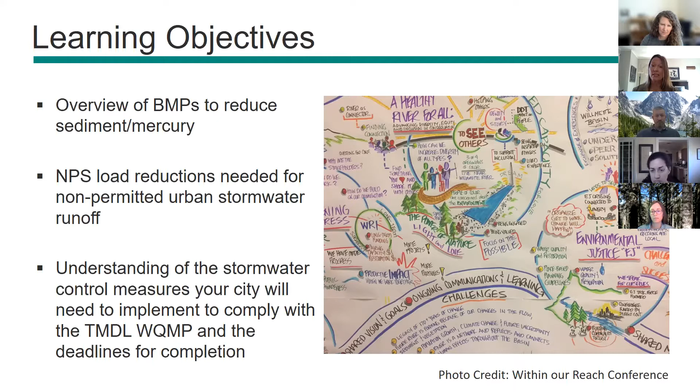This slide was shown in last week's presentation, and I wanted to show it again because I think it gives a nice overview, or a little bit of a framework, about where mercury is coming from and what our implementation strategies are going to be.

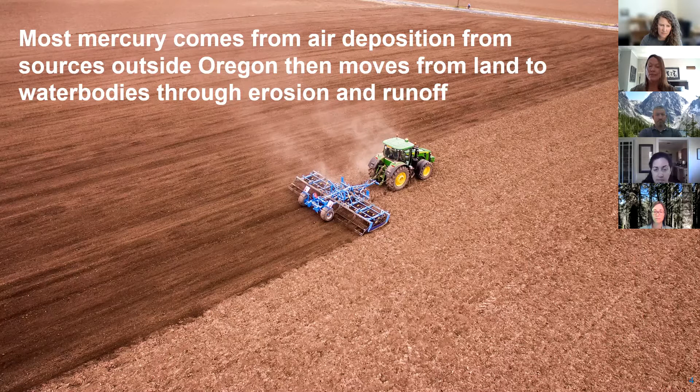Most of the mercury that is deposited in Oregon is coming from sources outside of Oregon - national sources, global sources of deposition, air deposition. These can come from coal-fired power plants, incinerators. There are other natural sources such as forest fires, which we're all very well aware of, volcanic eruptions, and the mercury that's contained in all sorts of products we use every day. So most of it's coming in that way.

Our primary implementation strategy for this TMDL is to reduce the amount of sediment and runoff going into Oregon's rivers and streams. So even if it is difficult for us to control those sources coming from outside the state, we're going to do what we can to reduce the amount of mercury making its way into rivers and streams.

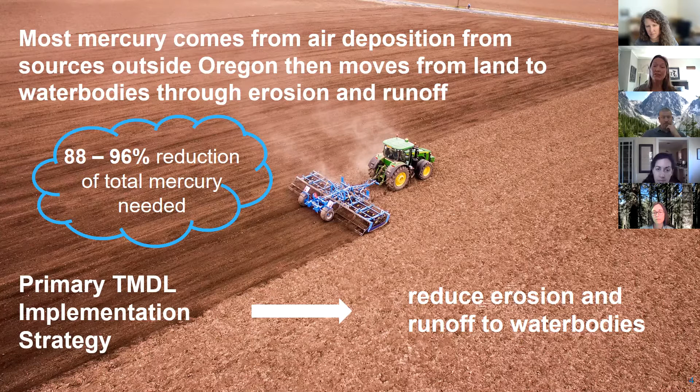There are large reductions to make for mercury for the Willamette Basin TMDL, and as you can see, it's 88 to 96% reductions needed. That is by subbasins - these are based on the 12 subbasins in the Willamette Basin. So very large reductions to meet, and that's mainly because we have a very protective methylmercury fish tissue criterion here in Oregon, updated in 2011. Because of that standards update, we needed to revise the TMDL to be able to meet that new methylmercury fish tissue criterion, so people can safely eat fish and shellfish caught in Oregon's waters.

EPA is also a DMA in this TMDL, so there are expectations for EPA. They have roles in cleanup of Superfund sites that we have, as well as air emissions, and they're going to help be responsible for some of the national and even global actions related to mercury reductions. The state of Oregon has also had bans and restrictions relating to products containing mercury - thermostats, vehicle switches. And in 2007, the legislature required dental offices to install dental amalgam separators. That effort has greatly reduced the amount of mercury going into wastewater treatment plants, though they still do have issues with that.

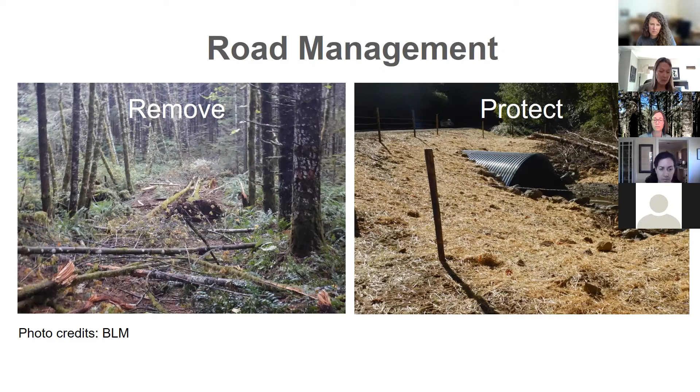There's a lot of construction going on all around us in the Willamette Basin, so construction site protection is important. DEQ currently has a stormwater construction permit called the 1200C, required for construction sites greater than an acre. For this water quality management plan, we'll be requiring construction site runoff protection for areas less than an acre, and Priscilla will be talking more about that.

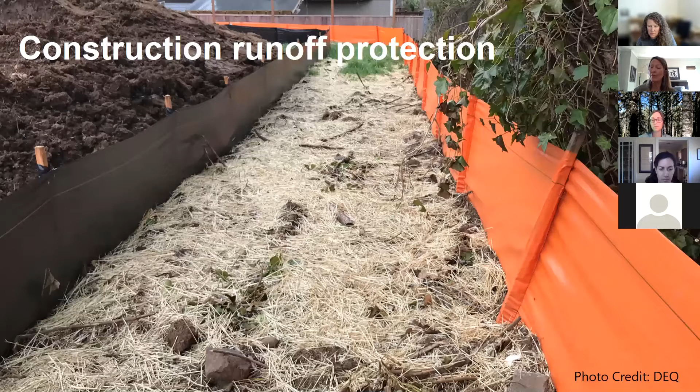In some cases we may have to treat stormwater, which can be expensive. If possible, it's best to infiltrate where you can to reduce the quantity of stormwater coming off impervious surfaces, but in some cases treatment of stormwater may be required.

Green infrastructure, otherwise known as low impact development—many people are familiar with this stormwater management strategy that mimics nature. Cases like these, where systems infiltrate and treat stormwater, are also management measures important for cities to implement where they can.

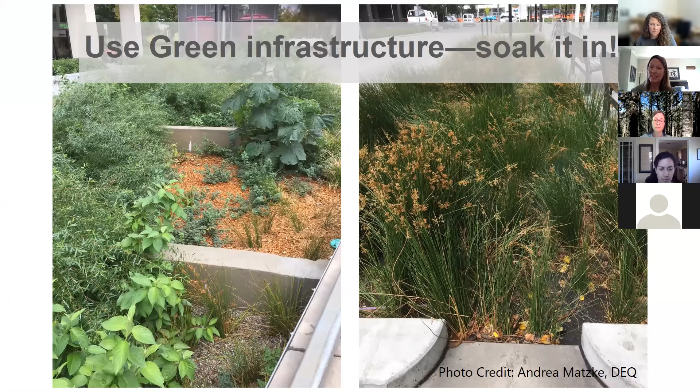So with that, I want to move into the stormwater control measure part of the presentation. Before I get into those, though, I want to note EPA's disapproval of DEQ's TMDL.

DEQ issued their final TMDL at the end of November 2019, and EPA did disapprove it, because they did not believe DEQ's TMDL was protective of all the subbasins. So EPA was then required to develop their own TMDL, which they did the following month, in December 2019. EPA's TMDL developed allocations for point sources, called waste load allocations, and for non-point sources, called load allocations, in each of the 12 subbasins.

So you need to look at EPA's TMDL to find out what those allocations are—don't look in DEQ's TMDL. There's a lot of good information in DEQ's TMDL about the modeling and source assessment, still very useful, but look to EPA's TMDL for the actual effective allocations.

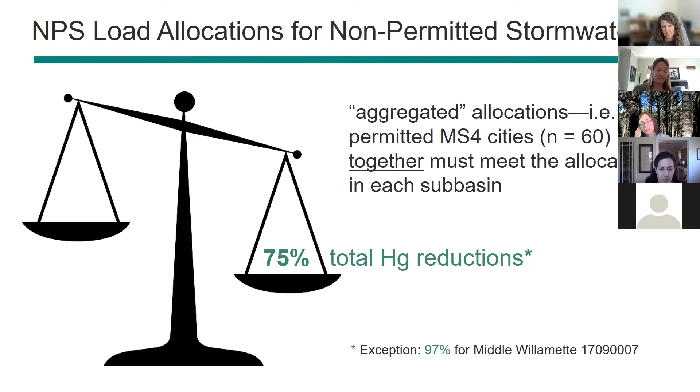Instead, the cities together, through collective strategic management measures, must meet that 75% reduction. A few notes on mercury in stormwater: we had a Mercury TMDL in place back in 2006. At that time, large cities with MS4 Phase 1 permits were required to collect mercury in stormwater data, so DEQ could get a sense of concentration levels. Out of many samples, the median value of total mercury was 4.62 nanograms per liter.

That's a really small number, in parts per trillion. Even so, our TMDL water column target is 0.14 nanograms per liter - very, very small amounts. So even though 4.62 is small, it's environmentally relevant, which is why we're focusing on stormwater management.

The model also indicated that mercury found in urban runoff was from atmospheric deposition, as I said in the beginning - most of it's coming from atmospheric deposition. That's the same case with cities. There's not a specific mercury source in big cities we're focusing on; it's simply the more impervious area you have - rooftops, parking lots, sidewalks, streets - the more that's going to run off generally.

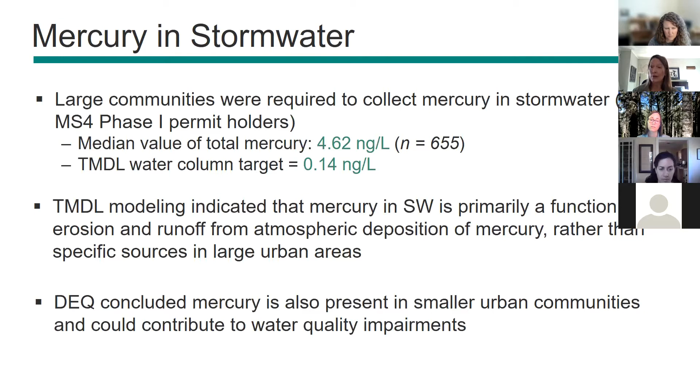The good news is that since the 2006 Mercury TMDL, DMAs have been implementing mercury reduction efforts. I won't go through all of these, but looking at sediment and erosion control plans for new and redevelopment - some cities have already been doing this. Some have been making use of LID practices. Another important one is conservation and enhancement of riparian buffers.

Many of the DMAs on the call today are also DMAs for the temperature TMDL, and as part of that you've been doing a lot of work around ordinances for riparian protection, in-water work, stream and tree planting in riparian areas. So that's doing double duty - helping reduce temperature while also providing buffers to reduce sediment going into rivers and streams. Some of your actions are already contributing toward mercury reduction.

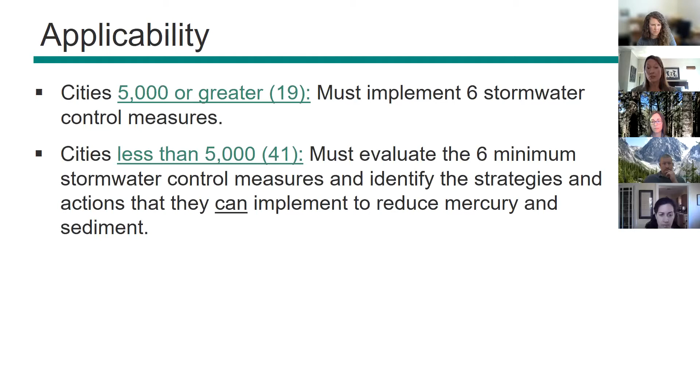So as part of that, when you are working with your basin coordinator, we're going to expect to see at least some of these 6 stormwater control measures being implemented or will be implemented over the years. You need to let us know the kind of challenges or any specific limitations you may have if you're not able to do that.

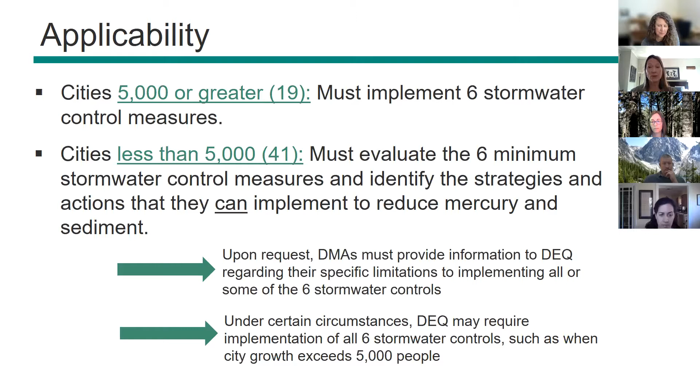In some cases, for example, if cities exceed that 5,000 population limit, we may require you then to implement the 6 stormwater control measures. Priscilla's going to be talking about the deadlines for those, but just remember, if you're less than 5,000, some of these you might be able to implement sooner than others. You can have time to implement some of these.

I want to pause here for questions before we move on, to see if anyone has any questions about what I covered so far. Again, Priscilla's going to cover more of the specifics related to each of those 6 stormwater control measures and the implementation plan requirements and some deadlines. But if you have any questions for me, please ask away.

Andrea, we have one question. It used to be that regulatory language associated with the Department of Agriculture was not mandatory—is that still the case? Are they thinking about having to develop an implementation plan? Maybe that's what they're referring to.

So ODA, Oregon Department of Agriculture, and Oregon Department of Forestry, in our OARs they have jurisdiction for water quality, and so they do not develop TMDL implementation plans. But ODA does develop area plans to meet TMDL requirements. I might ask Elizabeth, who asked the question, to follow up and see if she has any clarification.

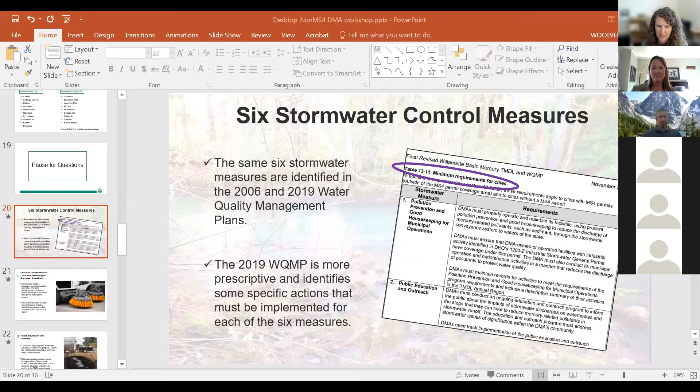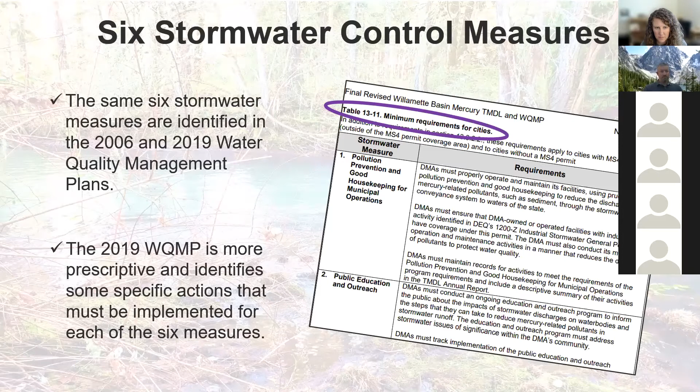This is Priscilla Wolverton speaking, and I'm going to go through the specific stormwater management requirements outlined in the revised Mercury TMDL water quality management plan. In terms of implementation, one of the biggest differences between the 2019 water quality management plan and the 2006 plan is that the 2019 plan is more prescriptive about the types of things DMAs have to implement under each of the 6 stormwater control measures. The information addressed in the next few slides can be found in table 13-11 of the 2019 water quality management plan.

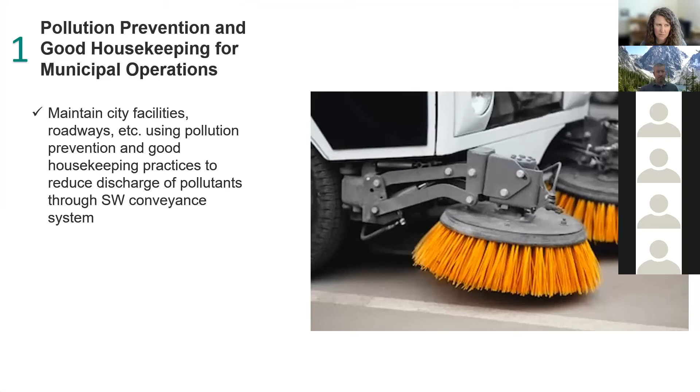Pollution prevention and good housekeeping is a strategy or program that a lot of you are already implementing. Andrea shared some numbers just a few minutes ago, and we saw that more than half of you were already implementing strategies that fall under this category. These things include cleaning and repairing your stormwater system, responding to spills, providing employee training, using integrated pest management, and a number of other activities that are inherent parts of standard operating practices for a lot of cities.

But even though you may be doing these things, you may not be tracking it. I want to remind everyone that the TMDL annual report requires a descriptive summary of activities. You should be able to report out every year to DEQ on relevant employee training provided, how you responded to spills and other discharges, system improvements, and any other best management practices you're employing to show implementation of the stormwater measure.

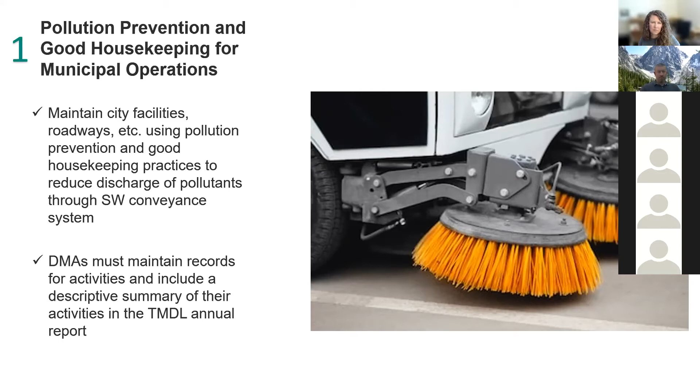Another strategy that you saw in Andrea's slide that a number of DMAs are already engaged in, over 60%, is outreach and education. Outreach and education is one of the more difficult strategies to assess against progress, yet it's one of the most important for implementation over time. That's because changing people's behaviors takes time, and it also takes consistent messaging. So maintaining outreach is important to getting your community and leadership on board with water quality protection and improvement.

The 2019 Water Quality Management Plan includes a requirement to qualitatively evaluate at least one education and outreach activity each year. This is unique from the 2006 plan, this requirement is new this time around. Examples of different tools include using surveys to gauge changes in community members' knowledge before and after an outreach effort or event, assessing changes in reported violations after targeted outreach is conducted, or tracking changes in community use of advertised services. So there are a lot of different ways to perform this type of assessment.

The goal here is to find a way that helps provide feedback about which outreach and education techniques are better at getting the desired results in your community. A number of our DMAs use newsletters and bill inserts, social media platforms, storm drain markings. They do specific outreach in schools and community centers. There's a lot of different types of ways to perform this outreach and education. I think what'll be more challenging moving forward is doing that assessment to determine which of those ways are benefiting your efforts the most.

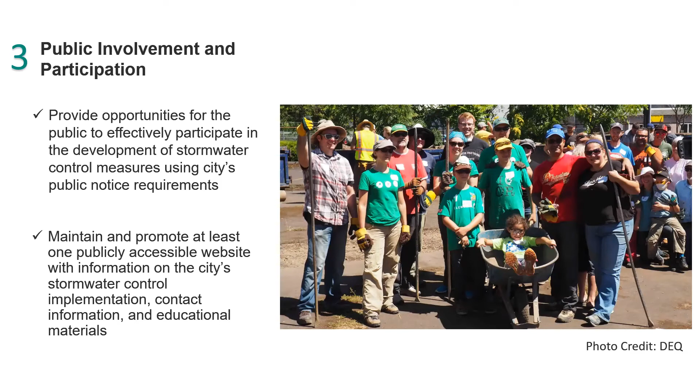Illicit discharge detection and elimination is a control measure that's about implementing and enforcing a program to detect and eliminate illicit discharges into your stormwater conveyance system. An illicit discharge is any discharge to a stormwater conveyance system that is not composed entirely of stormwater. The 2019 Water Quality Management Plan specifies that an ordinance or other regulatory mechanism must define the range of illicit discharges it covers, including discharges that are conditionally allowed, such as groundwater and lawn watering discharges.

I know I work with a number of DMAs that rely on a nuisance code to implement an IDDE program, and in a lot of cases that nuisance code suffices and meets the needs. But for some of you, you may have to revisit that code and make sure that it meets those definitions in Table 1311.

This water quality management plan also requires DMAs to maintain a map of the stormwater system and have a procedure in place to document complaints or reports about illicit discharges. A majority of DMAs reported in the 2018 Willamette Basin 5-year review that they had procedures in place for responding to illicit discharges. Far fewer actually reported having a tracking system in place.

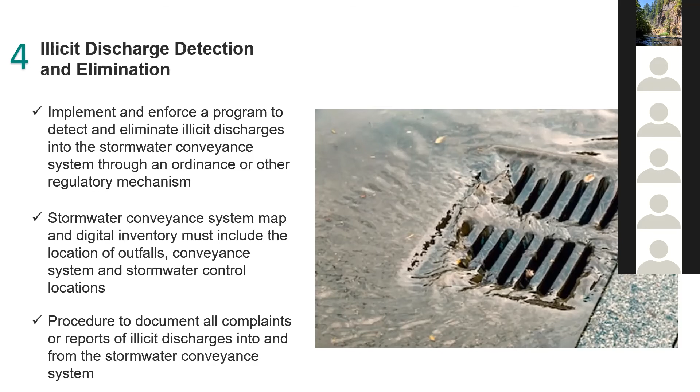Construction site runoff is one you saw from Andrea's slide, where we do have a number of DMAs that are implementing erosion and sediment control strategies and actions. What's unique or different in this water quality management plan from the previous one is that for construction projects that disturb 1 or more acres, the DMA must refer project sites to DEQ or the appropriate DEQ agent to make sure that they obtain the NPDES construction stormwater permit, or 1200C permit, that they should have.

I know a number of you already do this, but we've made it an explicit requirement in the 2019 Water Quality Management Plan. There are, however, relatively fewer large construction sites of 1 acre or more in many of our cities that are experiencing development. Many construction sites are smaller.

So the 2019 Water Quality Management Plan includes DMAs to require construction site operators to complete and implement an erosion and sediment control plan for project sites in its jurisdictional area that result in a minimum land disturbance of 1/2 acre or more. These erosion, sediment, and waste materials management controls must be implemented from initial clearing through the end of project and site stabilization.

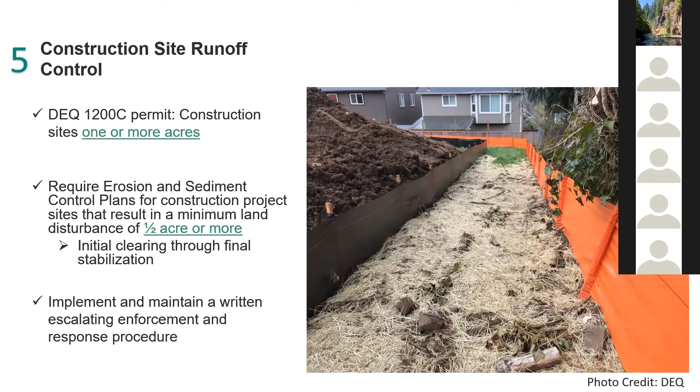After site stabilization comes post-construction site runoff. The 2019 Water Quality Management Plan requires DMAs to regulate post-construction runoff management for project sites that create or replace 1/4 acre of impervious surface or more. Stormwater controls must target pre-development runoff rates and volumes, and target 80% removal of total suspended solids.

There are many different types of stormwater controls that can be used to meet these targets, including structural controls like storage practices, wet ponds, detention outlet structures, or filtration practices that employ grassed swales, sand filters, and filter strips, and infiltration practices like infiltration basins and infiltration trenches.

There are also non-structural stormwater controls. You can use development standards and other regulatory mechanisms to minimize and treat stormwater before it runs off-site. But ideally, you're managing to keep and infiltrate as much stormwater on site as possible.

Something else that this water quality management plan specifically points to are long-term operation and maintenance requirements. With all of these different types of stormwater controls that developers can use, it's important that they're maintained properly. We think it's important that your city have the authority to require the maintenance of these controls over time.

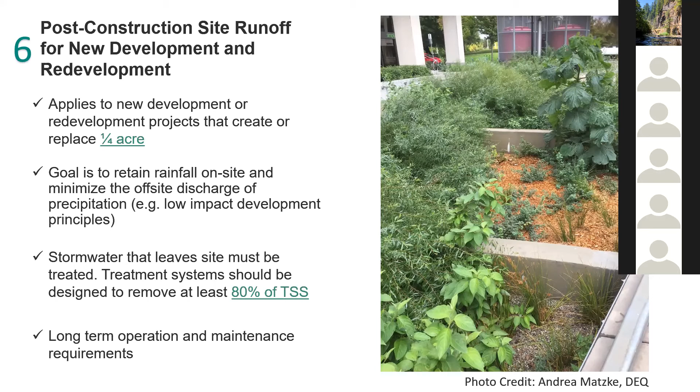Measurable objectives. So for each of these 6 stormwater measures and the specific requirements related to each of them, in your implementation plan, we want to see measurable objectives. This is something a lot of you already clearly identify in your plan, but not everyone is there yet. So we're going to be looking closely this time that your strategies include a method to track progress and document challenges. You need to be able to measure whether or not you're gaining ground on successfully and fully implementing stormwater strategies and the specific actions under those measures.

Your strategies also have to include interim timelines to measure progress against, so you need to be able to track whether or not you're meeting your targets. And if you're not, remember you can always use adaptive management to find a different or better fit for your community. So adaptive management continues to be an important part of TMDL implementation. It was in the 2006 Water Quality Management Plan, and it is an important component of the 2019 Water Quality Management Plan.

Implementation schedule. Andrea mentioned that we had identified specific timelines associated with each of these control measures and the specific requirements under each of them, and that those timelines are a little different depending on the population size of your jurisdiction.

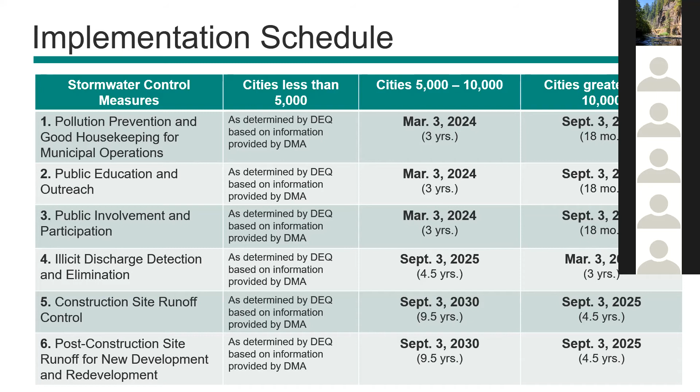And now we're just going to take a poll really quick, and Sarah's going to help us out here with that. We know that your city is already implementing a number of stormwater measures. Offhand, how many are you implementing currently?

Okay, so jumping around a little here. Looks like we've got just about everyone's response now. So the majority of you are implementing 3 to 4, so at least half of the measures. About a quarter of you are implementing 5 to 6, so that's great. But what it looks like is that for most of you, you probably have another 2 to 3 of these stormwater measures that you may be embarking on as a new effort here over the next 5 to 10 years.

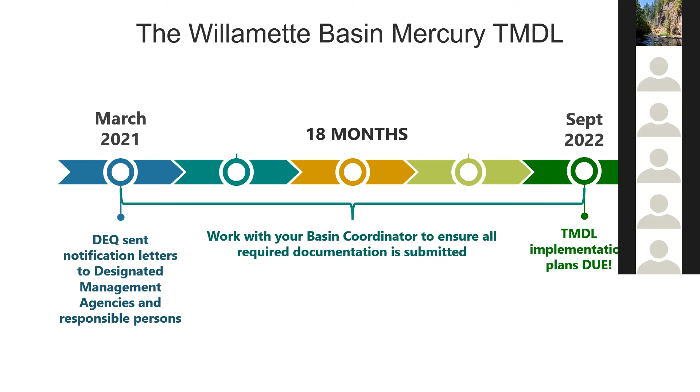And we've got some more upcoming workshops. Someone asked about the county workshop earlier, looks like that's going to be on June 1st, so just a few weeks out. The next one, we are not having a workshop on the 18th, so we're skipping a week, but we're going to pick back up on the 25th. And we'll be back on schedule to host a session every Tuesday then for the next few weeks.

And if you are here today, but you also represent a permitted MS4 or a county or a water conveyance entity, strongly encourage you to attend the workshop that's relevant to you, because the requirements for those entities are a little different than the ones we went over today. So I want to make sure you get all of the information.